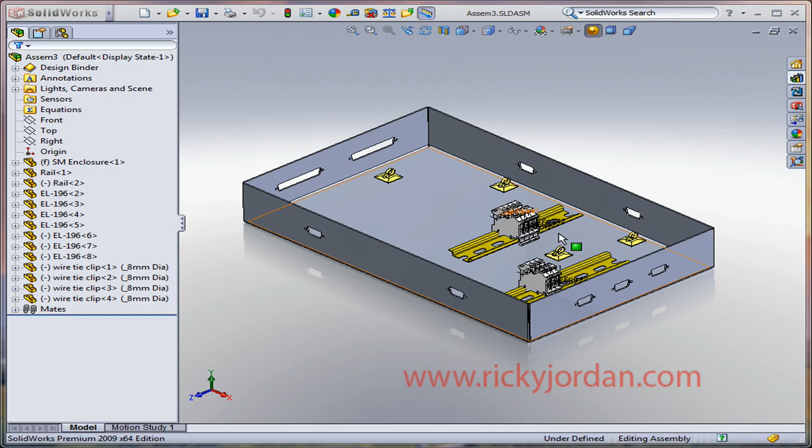Now in this instance we really don't have any electrical information, no from-to list or anything like that to start from. In the example shown here, we've got an electrical enclosure with a couple of connector cutouts, some DB9 cutouts on this side, some DB37 connector cutouts on the other, a couple of terminal blocks that are going to be used as part of the harness, and also some wire tie clips strategically placed in the internals here.

Now this is a wire tie clip that's included in the base install. Wire tie clip is the part name, included on every install in the harnessing electrical folder. So I brought that in and used it in this example.

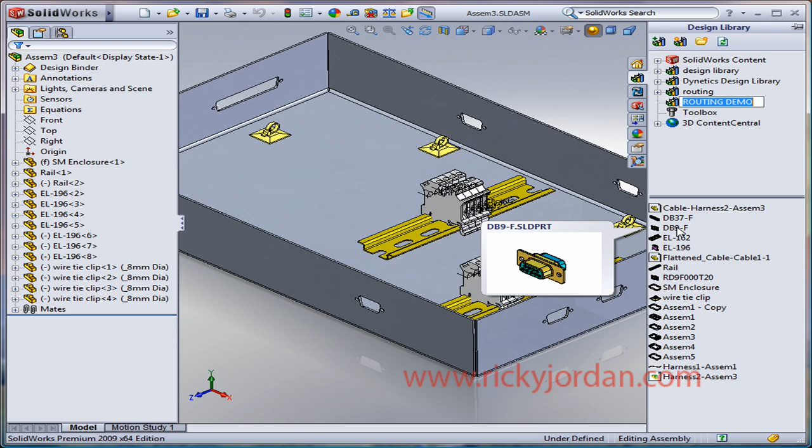To start with, I've set up a little routing demo folder here in the design library to pull my parts from, and I'm going to start out here, zoom in, and grab a DB9 female connector.

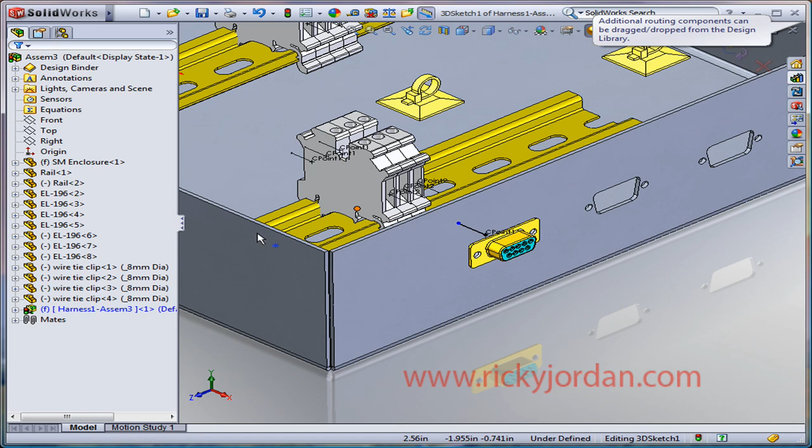We've got smart mates in place here, allowing me to place that connector. Now because this connector had a connection point in it, it's going to kick me into the auto route command to start with. I'm not ready to auto route just yet - I've got more components to place, but note that a 3D harness assembly has been created in the feature tree there.

So let's drop in the second DB9, and since it's not auto routing to start here, I was able to drop two consecutively with no problem.

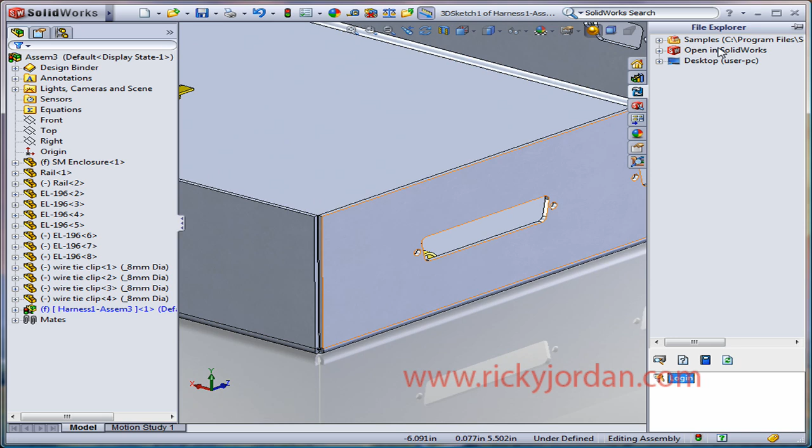Let's spin around, go back to our design library, and drop in a 37-pin connector on this opposite face. Again, smart mates are taking effect here, and note that because these connectors have connection points in them, we see the little stubs that are being created.

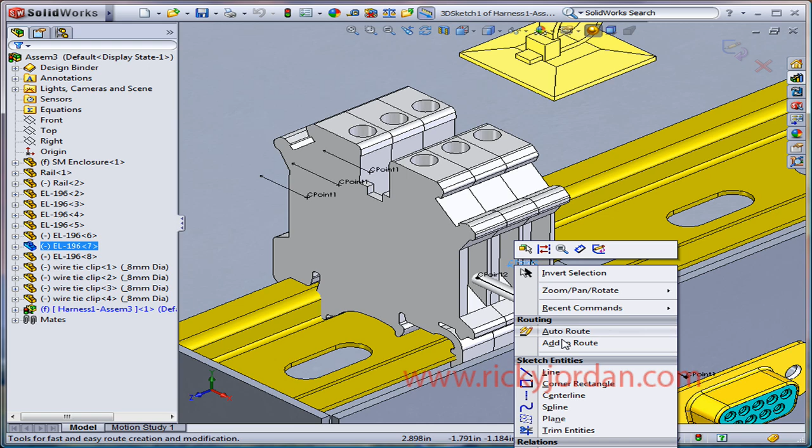I can also take advantage of these connection points that are part of the terminal blocks. Even though these terminal blocks are in the top level assembly, I can come in and simply use the add to route command to add these connection points to this existing route, because we know we've got wires in this harness that are going to run to these terminal blocks.

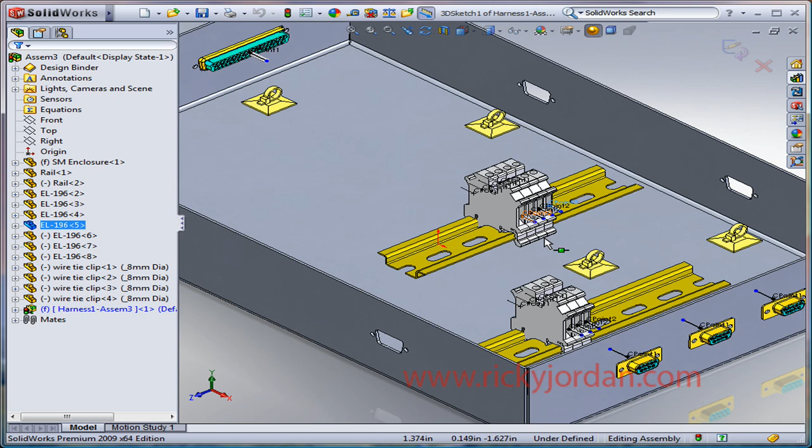So we're going to zoom back out a little bit here and go ahead and prep for the start of our routing.

To begin routing, what we're going to do is go to one of these stubs, and we're going to just start off with this first DB9 connector here. We know that this first connector is going to route over to this terminal block.

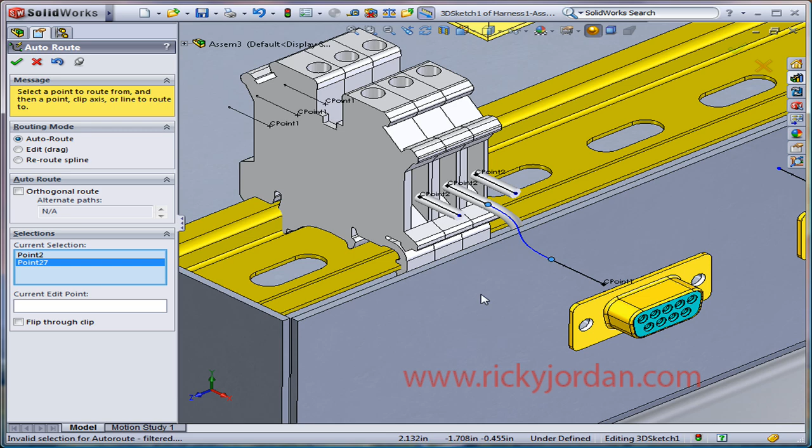So I'm going to right click and go ahead and initiate the auto route command, and I'm going to pick this point to connect to start with. I also want to tree off and route to the other two points, so I'm just going to simply use the endpoint connections to connect these two stubs directly to this route. You can see it's just simple picking of points with a route allowing me to do this.

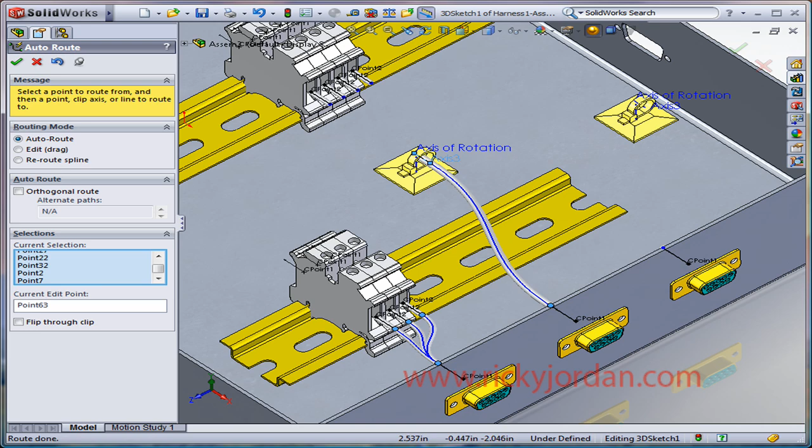Let me start with the next one. This time I'm going to run through the wire clip, and since it automatically has the proper connection point - which we'll talk about a little bit later in a later post - it automatically senses that and allows me to run the route through. At this point I want to do the similar thing I did with the other route.

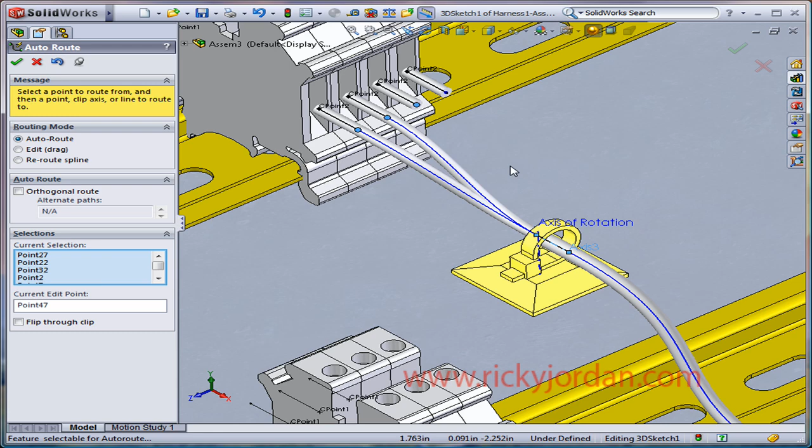I want to connect some of these other terminal block connections to kind of tree off and branch out as it comes out of that wire tie clip. So that connection should finish it out here.

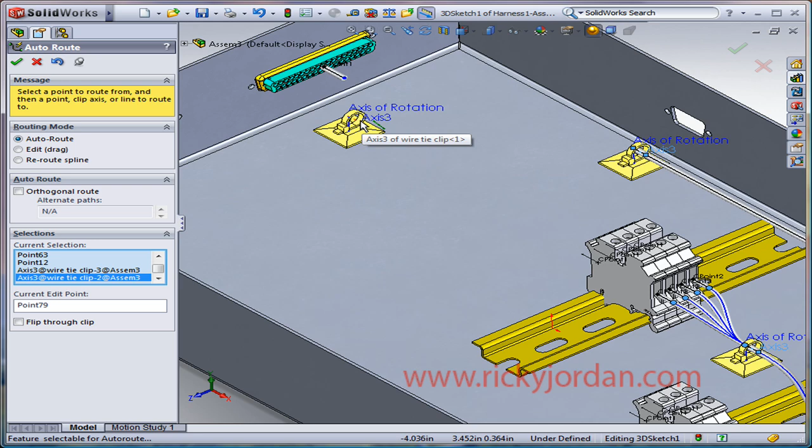And the next thing I want to route is going to be over here on the third DB9. Instead of going to these terminal blocks, I'm going to route through the first clip, then to the second clip, and over finally to the third clip, and then up to the 37-pin connection.

Now I get a warning here - it's basically some bend radius checks I have turned on that says my minimum bend radius is 1/8 of an inch, but currently with this little twist we have at the end here, this little kink, it's less than that - it's 0.088. So it's just giving me a warning there. We'll worry about that just a little bit later.

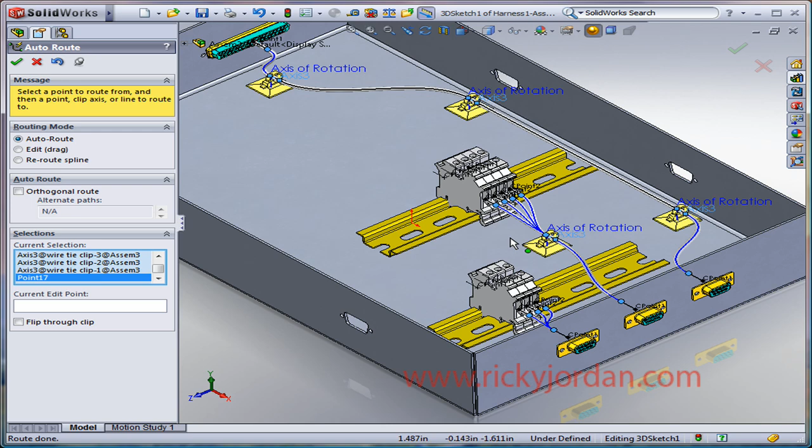Now at this point I've got what looks to be three different harnesses, but I'm not done yet. I've got some signals running from this DB9 over to the 37 pin, as well as some signals from the second DB9 that run over to the 37 pin as well.

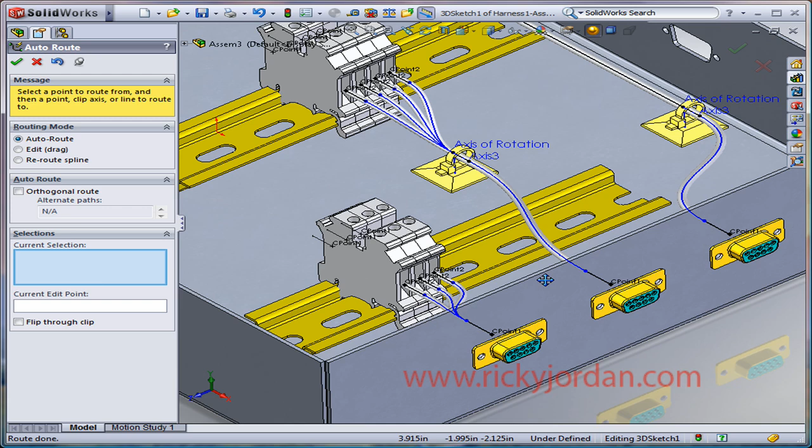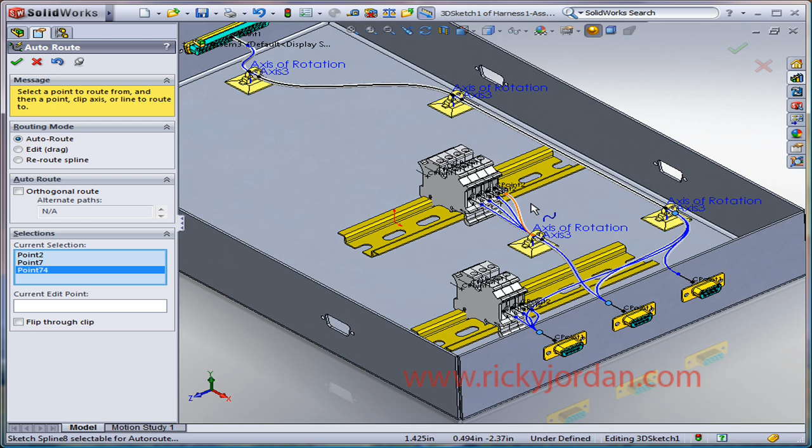So what we're going to do is go ahead and start clearing out our auto route. I'm going to route from this point on the first connector over to the route created that runs to the 37 pin, and do the same thing for the second DB9 over to the route for the 37 pin. What I've done here is very quickly run all of the basic routes for this 3D harness.

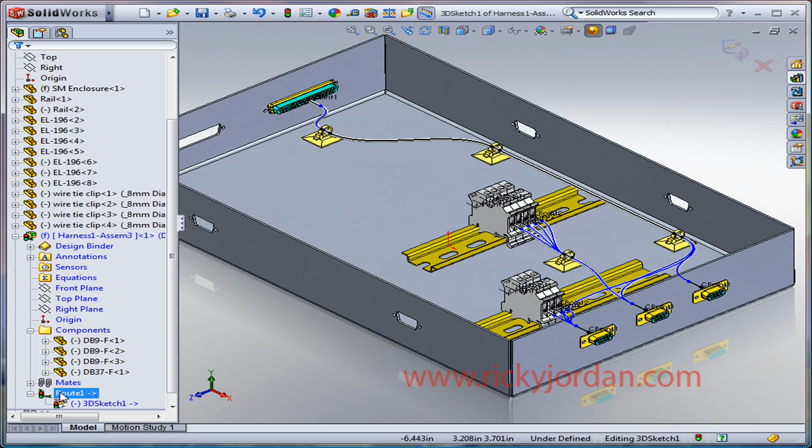So I'll go ahead and close out the auto route command. You can see in looking at the assembly structure, since I haven't exited the sketch command, it's still going to show that I've got components, but this is, by the way, a virtual subassembly inside of this assembly.

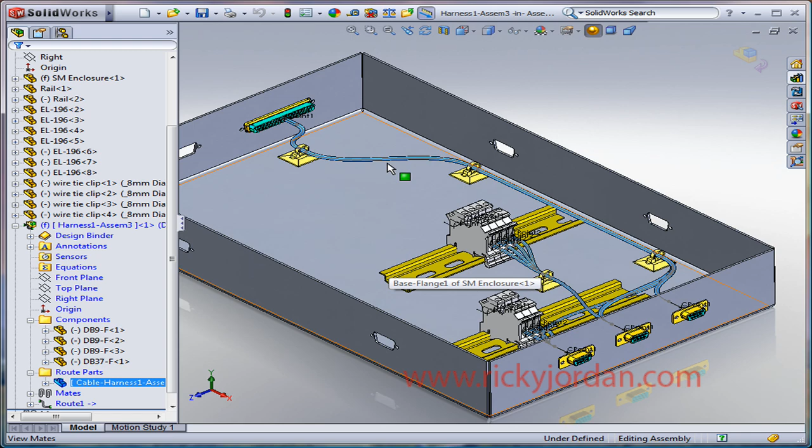As I close out this 3D sketch, it's going to automatically create my route part, which is another virtual part inside of that virtual subassembly, containing the 3D solid data for the route itself. All of it is connected through that route sketch, which is defined in context of that virtual subassembly, which will allow me to put all of my wiring information in.

So we're going to do that in a little later post, just so we don't keep you here for a very long time in this video.